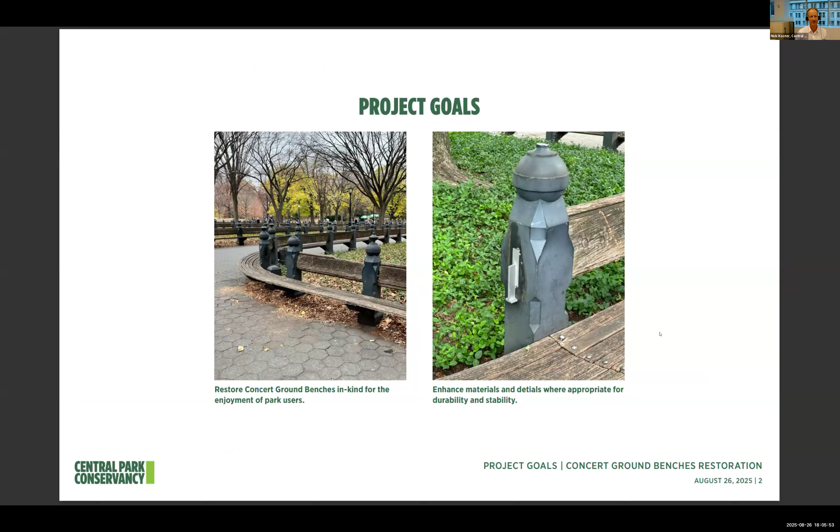Great, thanks Diane. So as Diane mentioned, the first project we're sharing today is an in-kind replacement of the seats and backs of the concert ground benches. The seats and backs have reached the end of their useful life, and as part of this restoration, we're going to be updating a few of the details and the wood selection for increased durability. So just to ground everyone in the location, it's located at the southern end of the park, at the northern end of the mall, near Bethesda Fountain, and south of the 72nd Street Cross Drive.

We have a few historical slides to show you the history of this. This feature was designed by Olmsted and Vaux, originally as a tree-lined element leading to Bethesda Terrace. Music was a regular activity along the mall, and in 1862, the ornamental cast iron bandstand designed by Jacob Wrey Mould was built, which you can see in the back of this picture. To accommodate the sizable crowds at these performances, the mall was redesigned by Vaux in 1873, and that's when the continuous wooden benches with the unique design came in.

So in the 1920s, the Naumburg Bandshell was built, and that was really done to provide a better venue for the concerts that had really grown in popularity in this area, and the benches were removed around that time. The area's layout was really oriented more towards the bandshell. The concerts continued in this area for many decades, but the photo we're showing you here is from the 1970s, showing how much this area had declined and really become a bit of an eyesore.

Over the years, we've done small repairs and maintenance on these benches, but it's now time, as you can see, for a full-scale reconstruction. A lot of the bench slats are splintering or missing in some cases, and some of the posts are damaged and need some work.

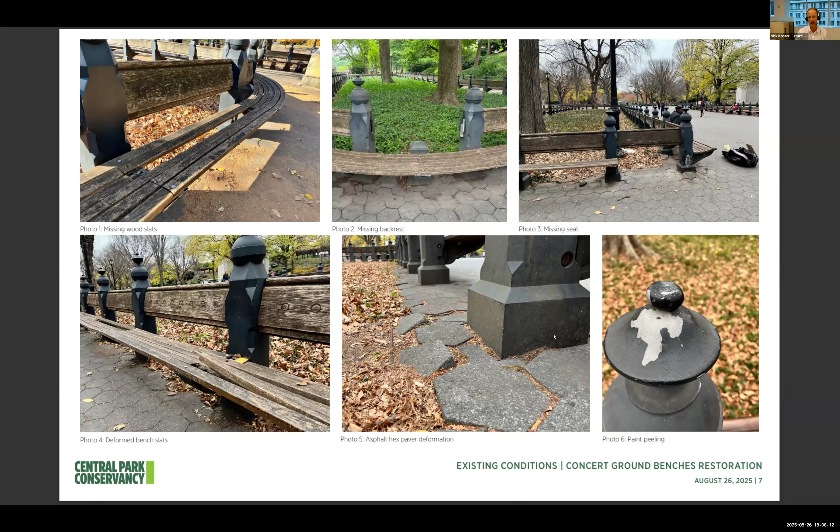So this is a project highlighting the scope. What we are doing is we'll be replacing all of the wooden bench slats on the seats and backs and replicating the unique flower pattern. We're going to be repairing, refinishing, and reinstalling all the cast iron bench posts, and we'll be removing and resetting the asphalt pavers around the benches.

This is a project we're hoping to get started on in the late fall, and it's going to be phased around this area, which has quite a few events. We expect it to take between 6 and 9 months. So I'll stop there, and if there are any questions on this project, we can answer those now.

We don't have to do a resolution, so we don't need to do our normal formal project process, but does anyone have any questions? Do we need to know what materials they're going to use for the benches, or wait till later for that? There will be no later because we're not going to do a resolution, but if you're curious, go for it.

Could you talk a little about the material for the benches? Sure. So the current benches are oak, and we have been working with a wood called Accoya. It's a treated pine product, actually the same wood we've used for the decking at the Bow Bridge and Gothic Bridge restoration. Both of those have been in over a full year season and are holding up really well. Currently, we're working with a couple different stain manufacturers since it's a very light colored wood. It grays out over time, but we're looking to see if there's a stain we can get comfortable with the finish of, to really ensure they look good. It's a really robust product, and we've been very happy using this wood elsewhere in the park.

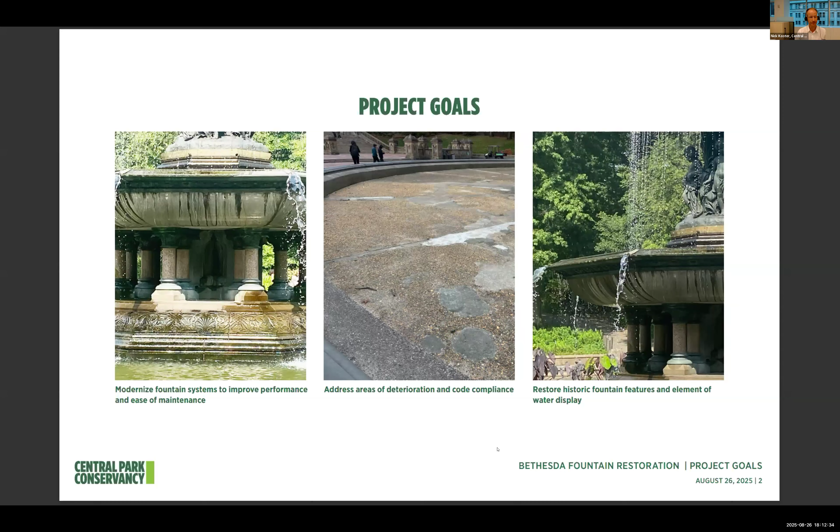Next, just to ground us, I'm sure most of you are very familiar with where this is located, just north of the concert ground benches on the other side of the 72nd Street Cross Drive, and this is the terminal feature of the mall. We are very lucky to have many historic drawings from the original fountain to draw from in our research as we're working through the design intent and looking at the missing elements.

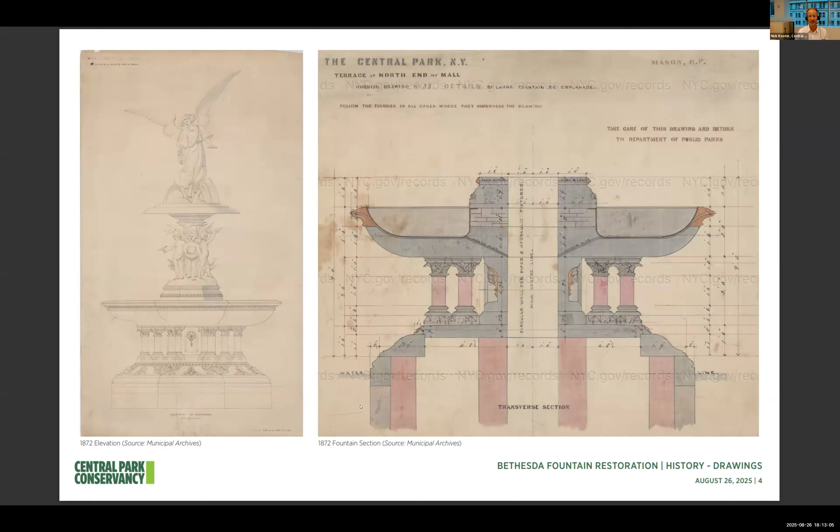We also have a lot of photographs of the fountain, which have helped us with our research. This is one from 1873, highlighting the Angel of the Waters sculpture, designed by Emma Stebbins, shortly after it was installed. Moving forward to the early 20th century, that's when the terrace was repaved with the paving we're familiar with today. And finally, this is a photograph of it fairly recently in its current condition.

Just to note, the Central Park Conservancy manages and maintains the fountain, which includes the annual rewaxing and cleaning of the sculpture itself and any ongoing maintenance issues with water flow or water quality.

Now to walk you through the restoration proposal, starting with the sculpture and the bronze features. Here we have an elevation of the existing and the proposed. The red lines highlight the areas where we are looking to recreate bronze elements.

The topmost one, the bronze applique below the putti, will be restored to conceal the exposed stone. There's a bronze lip at the middle basin that's going to be removed, cleaned, and reinstalled to address underlying issues causing a lot of the staining we're seeing on the granite bowl below.

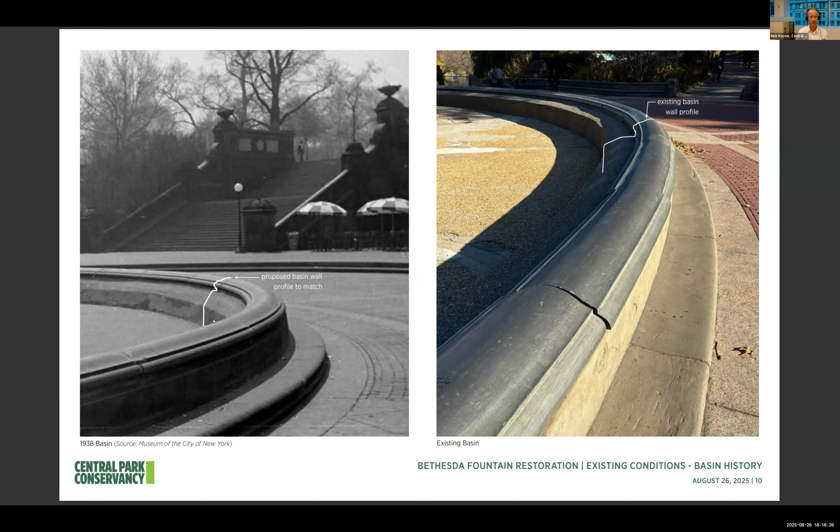Looking at the project now in plan, all of the work regarding the mechanical, electrical, and plumbing upgrades is located off the fountain itself to the northeast. Currently, there's an existing vault below grade that's mostly concealed within the landscape.

This slide is highlighting the upgrades that will be housed in this location, and it includes three new structures that will be screened by some existing and new proposed planting.

This is a zoom in of that same plan, showing the existing vault structure as well as the three new structures with their dimensions.

The new elements include a new RPZ, needed for code compliance, and a below grade vault for the filtration equipment we're going to need for water quality. I should mention that's something we've been doing on a lot of our fountain work in the park—creating recirculating systems with the fountains, but then also creating a filtration system for that water to ensure its clarity and quality. And finally, an electrical panel, which will be used for controlling the new equipment.

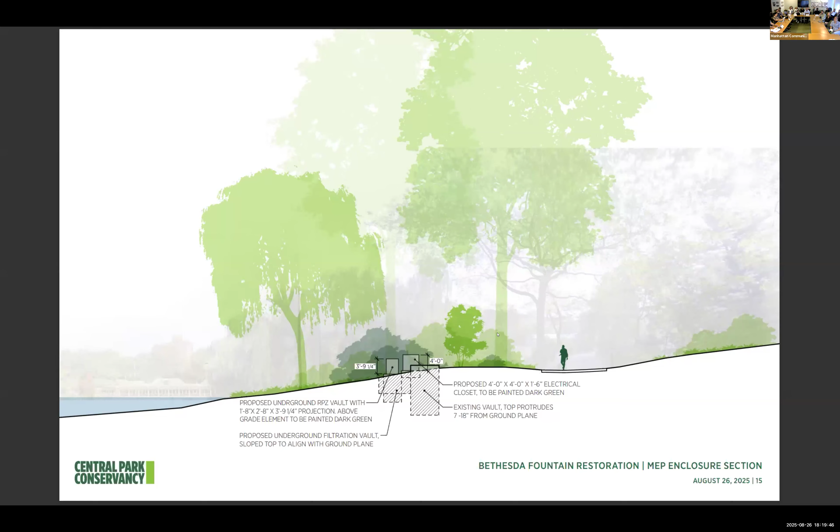Yeah, could you go back to slide number 8, please? 8. I noticed that on one of the old photos, you don't have something that you have on the new one. I'll show you what I mean.

So here you have a little gizmo, help me out with, you can't see what I'm pointing at. The flower that they're adding to the fountain. Do you see what I'm pointing at, the red? What's the story with that?

When we were doing research on the fountain, we did a lot of research through historic documentation and photos. We can tell from the historic documents that there was a floral bronze element installed in all 4 niches, and there's photo documentation of that. So our conservation staff used both the photographs and the graphic documents to recreate them in 3D using 3D software. We're currently doing 3D modeling and different prototypes with 3D printing, and those would be reinstalled in place. The other evidence in terms of that flower is that there are anchor holes that used to house where the original flowers were anchored, which are now patched. So we would be reusing those existing anchor holes so as not to damage any masonry.

So the existing bronze, we're examining to figure out the correct chemical composition. We do a hot wax treatment each year on all the bronze work. So any new bronze elements, we would try to align as much as possible with the existing bronze and refinish it in exactly the same way. It would be another hot wax treatment, which would have a similar patina to what is currently there, just a dark brownish greenish color.

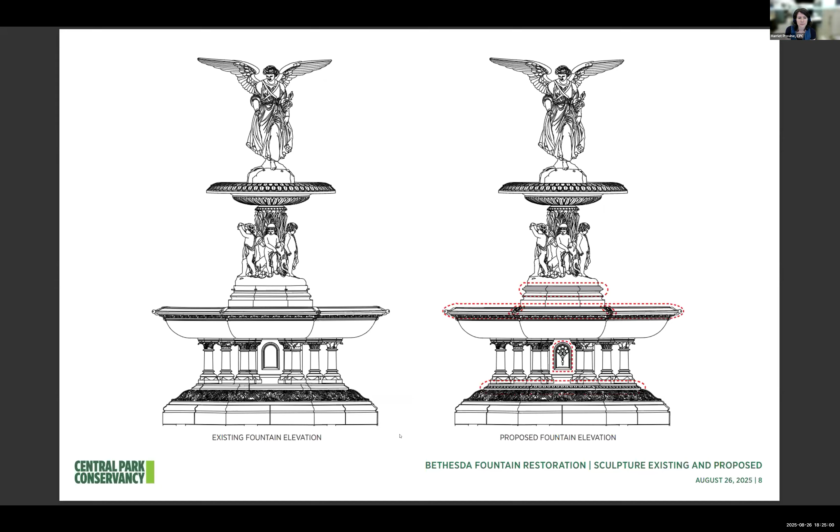I have two quick ones, one unrelated. This seems like a significant project. How long do you estimate the construction is going to take?

We imagine that it's going to be about a year of construction. We're looking to get it started in June of 2026, and the goal is to have it wrapped up by June of 2027.

That's everything, including the benches that are gonna take 6 to 9 months? The benches are a different project. Those we're expecting to start late fall of this year, and they'll be phased over time to minimize as much as possible the impact on that part of the park. But for Bethesda Fountain, for this project, we're expecting to start June 2026, and it would take a year, so we would be completed by June 2027.

Just a follow-up, what will it look like during the construction period? Will the entire site be walled off? Can we go back to the larger plan? There'll be a fence and staging area around the fountain and basin. The goal is for the paths that lead down to the fountain to be accessible so that people could circulate up through the arcade and up towards the mall. And there would be another fenced off area around the vault as well, but we really want to make sure the circulation is open as much as possible within this area.

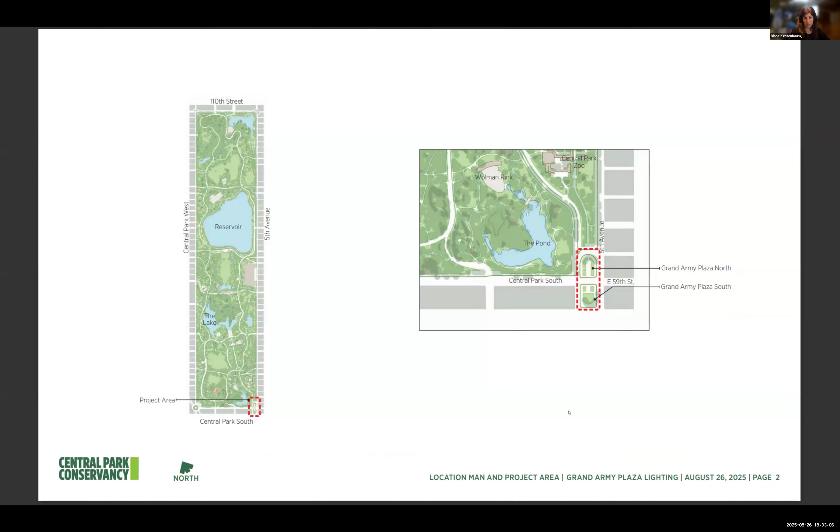As I'm sure many of you are aware, you know where Grand Army Plaza is. It's at the southeast corner of Central Park, and we're talking about work at Grand Army Plaza North and Grand Army Plaza South. That's what we are looking for your approval on. Just to refresh some of your memories, some of you may see the construction fence outside. Grand Army Plaza South is currently under construction.

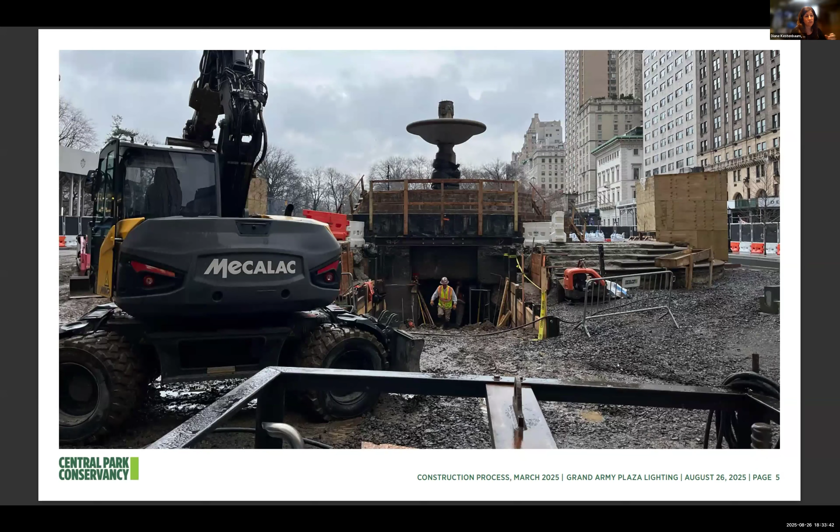We started this project in June 2024. We are completely restoring the fountain, restoring all the granite elements. We are restoring Pomona. She was removed from her perch earlier this year and is now in a conservation studio in Ossining. She's looking beautiful. We are expanding the vault underneath the fountain to give greater access to our operations staff to maintain it. And then last but certainly not least is all the amazing bluestone and granite curb work and everything we're doing here. We're making the plaza accessible and doing a lot of different elements, including lighting, which is the reason why we are coming back to you today.

So just really briefly, our project goals for this element of the current construction project are: we are looking to maintain the lighting levels required to meet public safety standards with historically appropriate fixtures. We of course want to meet DOT requirements for lighting infrastructure maintenance. And then a new element to this is we are looking to add nighttime lighting to some of the really beautiful historic features in the plaza.

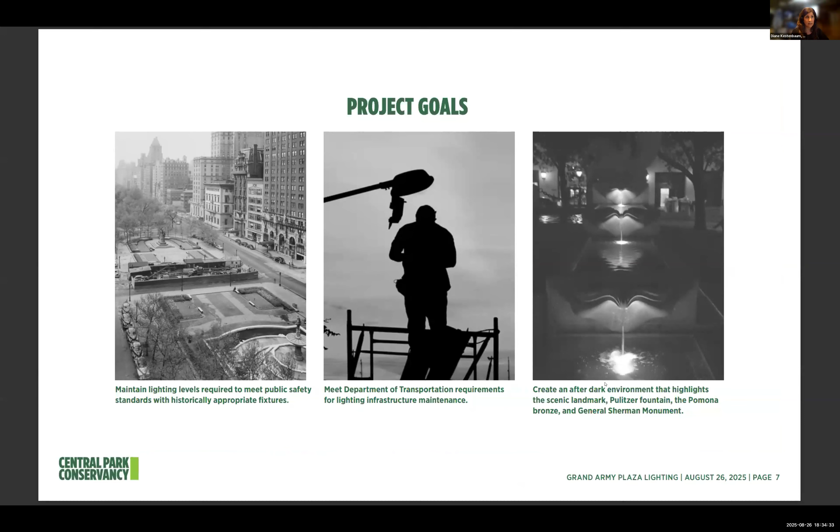That spurred the Conservancy to do this restoration project in the first place. We got the approvals in 2013, and given the more immediacy on the north side, that went first. Construction started in 2014 and was completed in 2015. The South Plaza was expected to go forward very quickly afterwards, but funding issues and the global pandemic delayed it. We did start the project in construction, as I mentioned, in June 2024, and the expectation was we were going to complete the South Plaza as it was approved in 2013, matching also what was approved for the North Plaza.

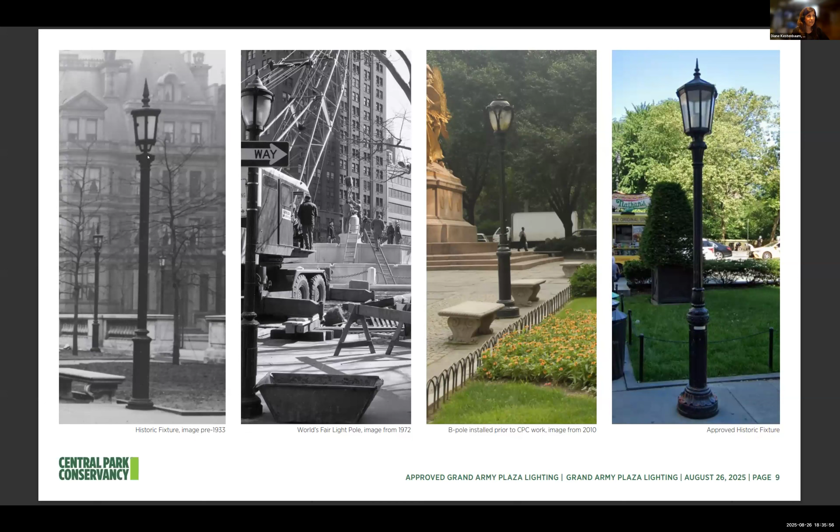Some of you may be aware that DOT maintains all of the lighting in all public spaces, public parks in particular, and so we have to follow their maintenance requirements. They require something called a photocell, which automatically turns the lights on at dusk. Of course it makes sense, right? You want to make sure the lights turn on automatically and nobody has to go out and hit a switch in order to turn the lights on. But the issue was that DOT said we couldn't use this fixture, and they gave us two options.

One is to use what's called a B pole. This is something that had been in the park prior to our construction project, but it's not a historically appropriate fixture, and it wouldn't match what's in GAP North. The symmetry between the North and South plazas is a huge feature of it, and so we wouldn't want to have different light fixtures.

The other option that DOT gave us was to install a larger, taller pole that would gang all the light fixtures together, and we could put a photocell on top. But given the issues with the B pole, we did not want to use that.

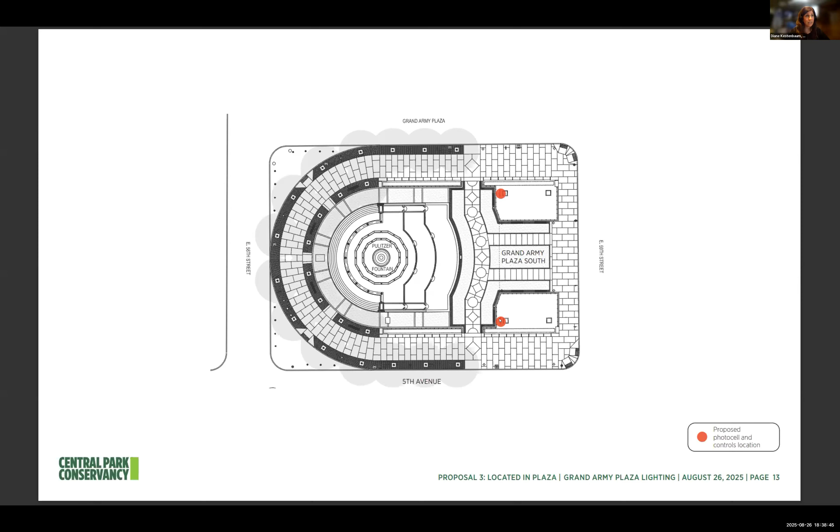So what we came up with, and what we're looking for your approval on, is to have two of these poles on the south side. We decided on two of them for symmetry, so two in the north and two in the south. We'd be able to put the photocell on top, satisfying DOT's requirements. These would be just outside the planting bed, and for the most part they would recede into the background. These are things people see in many locations throughout the street bed, the streets, and the park.

But one additional element we are looking for, taking advantage of the fact that we'd have these tall poles in the plazas, is to reinstall lighting at the plaza to light the General Sherman Monument, the Pomona statue, and the fountain.

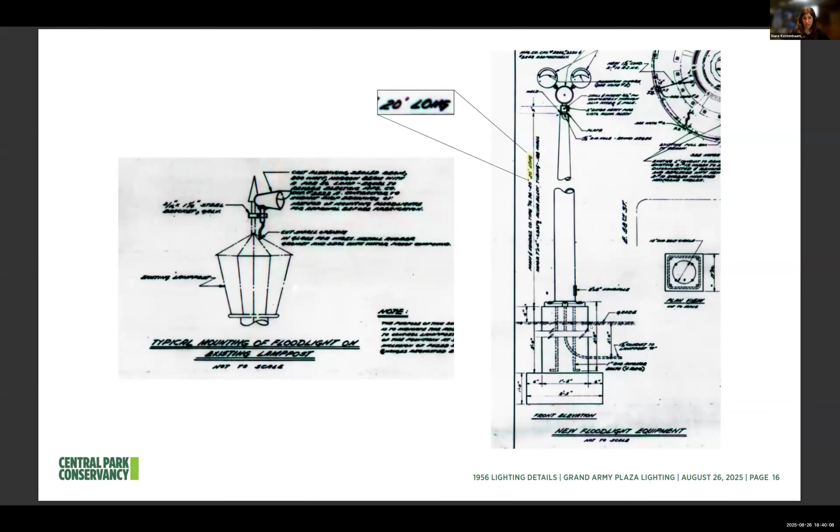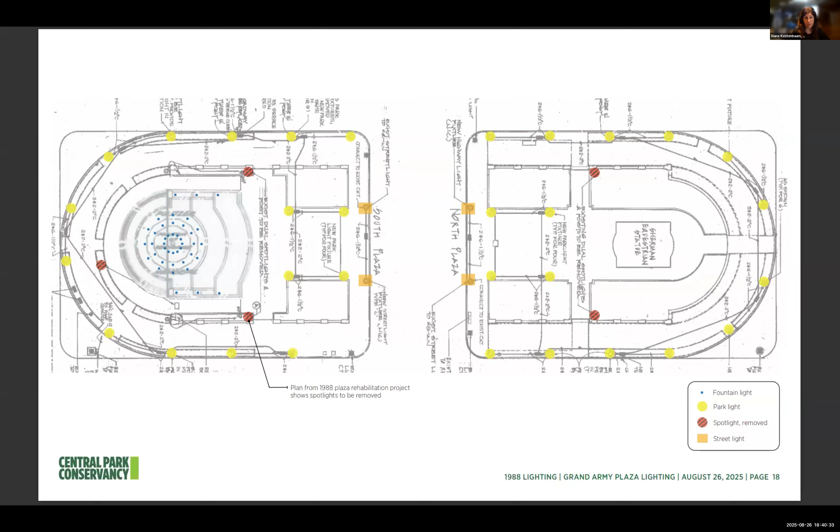But these were actually removed in the late 1980s when the Conservancy did a restoration project—that was the last time we did a full-scale restoration. You can see their little hatches in these red dots, so those spotlights were removed. The thought at the time was to install them on adjacent buildings, the Sherry Netherland, the GM building, the plaza, but that actually never happened. So these features have not been lit in a very long time.

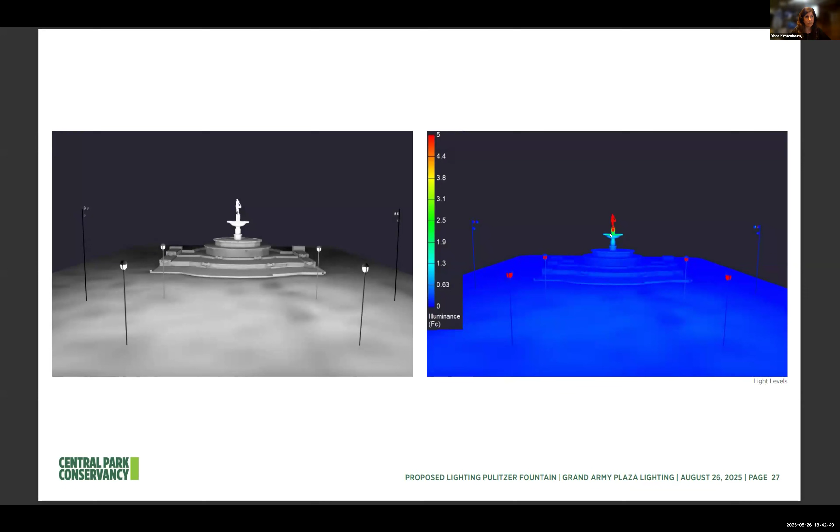So we did a few studies just to show what the lighting would look like on these heat maps, showing what would be lit for Pomona. And then this is in the winter when those pin lights in the fountain itself are turned off. It would just have a nice lower wash on the fountain itself, but it would still be focused on Pomona. And then the north showing Sherman.

And then this is what the fixtures would look like. There would be 4 lights on each pole focused on the monuments themselves. And this is actually what the photocell box, the control cabinet, would look like. This is the photocell, this is the control cabinet, this is the little photocell right on top. And then I think we're missing a light fixture here - there are actually 4 of them.

One other thing I wanted to mention is that we have also spoken to our lighting consultant about these lights and any potential impact they would have on bird migration. What they've told us is that since there are larger buildings that are lit, this would sort of blend in with what's already there. We are also using a 3000K light, which is preferable - it's a warm light, which is preferable to cooler color temperatures, is what I'm told. So it's something that's not supposed to impact the birds as much. But that being said, we would have controls so that if there is an issue during bird migration, we could lower the lights, we could do what's needed to protect the birds.

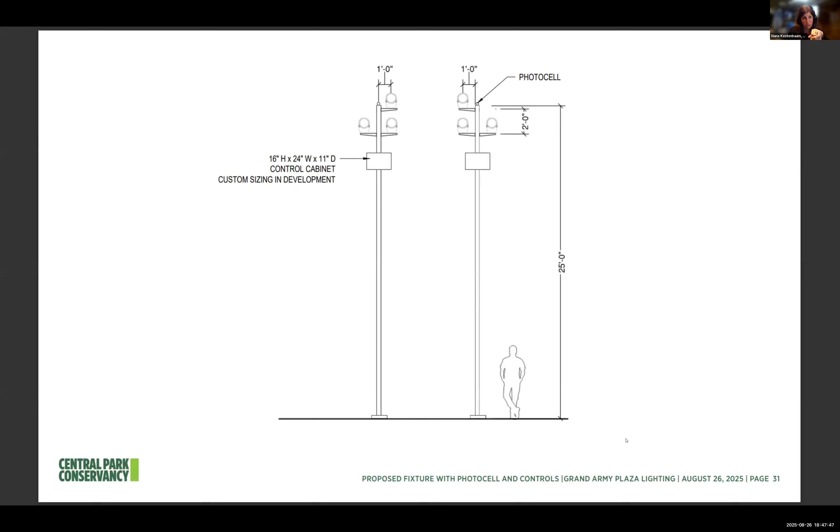Gina? Our reason to do this was so we could keep those historic fixtures and match what's in Gap North. Because we're doing so much to restore what the 1916 historic design was, with the paving patterns, the fountain, and so many other aspects, we wanted to keep those historic fixtures as well, the light fixtures as well.

How many historic fixtures are still going to be left on the North Plaza and then on the South Plaza? We could go back to the plan. It's quite a few, they're 12 feet high. Let me think of just the number, it'll take me a second to get there. Let's go to the first one.

Here you can see it's all the yellow fixtures that match the historic ones. So it's I think 16 per plaza, 14 or 16. And then the wiring would be just from one of the towers that will control when all these lights go on simultaneously? Yeah, yep. Okay, thank you.

My question is about the size of the control cabinet, which is mounted pretty high up where you have the four lights. Maybe you can talk a little about it, I think the size is a little unfortunate. Of course I'm sure you want it smaller too, but 2 feet by 1 foot by 16 inches is quite big. Did you consider mounting it at the ground? I don't know if that would be worse, maybe a tripping or kneeling hazard, but it looks a little peculiar floating up there to me.

Yes, that's a good observant question. The bottom of the box has to be at a minimum 12 feet off the ground. We did study it in a mid-range position and found that to be more offensive than higher. Right now we're showing the box size that the DOT said they would fully sign off on. We're meeting with them weekly on this, since we're deep in construction, and we're looking to reduce it, make it less wide and more long so it aligns more with the pole. We want to confirm that with them before we update it, but the goal is something longer and narrower.

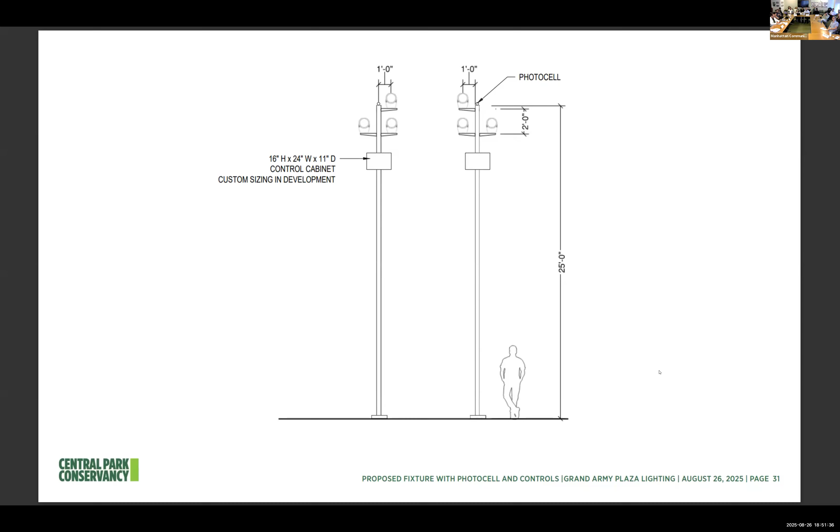Michael? Yeah, one more question. Just to the north, on the other side of 59th Street, just north of the North Plaza, there's a performance space where there's oftentimes artwork on exhibit, on the path toward the zoo. Was there, you know what I'm talking about, right? Yeah, just to the north. Doris Freedman Plaza, yes, I didn't know it had her name. Was there any thought to shining one of those lights over there for the artwork that you oftentimes install in that area?

That's done through the Public Art Fund, and it's different each time. I think if we did look at adding light for that, it would be part of a different project. It's a unique installation each year, and it's something we don't have as much control over. Thank you.

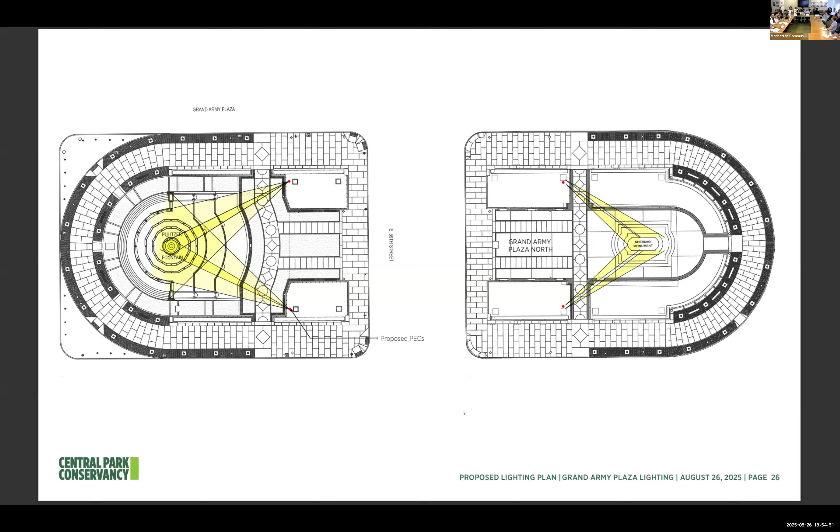Personally, I find it tough to conceptualize how these will look. I know it's impossible to design it without showing it, but is there a slide that best captures what it'll look like when it's all said and done?

This even shows it as well, though it's a little hard to see. You know what was helpful was when we looked at the precedent from the 80s, the red ones. That's three-dimensional. Maybe we can look at that slide to compare these proposed black ones to what was there previously. I think they were red, which was unfortunate.

We just put them as red to highlight them, to point them out. So let's look - if we know how tall these were, we'll have a point of reference. And this one was 20.

This looks a little bit - this typically would be 12 feet, so this looks slightly lower than that, maybe 11 and a half. So 20 versus 25. And these were 2 lamps per pole, we're going to have 4 lamps per pole and a box.

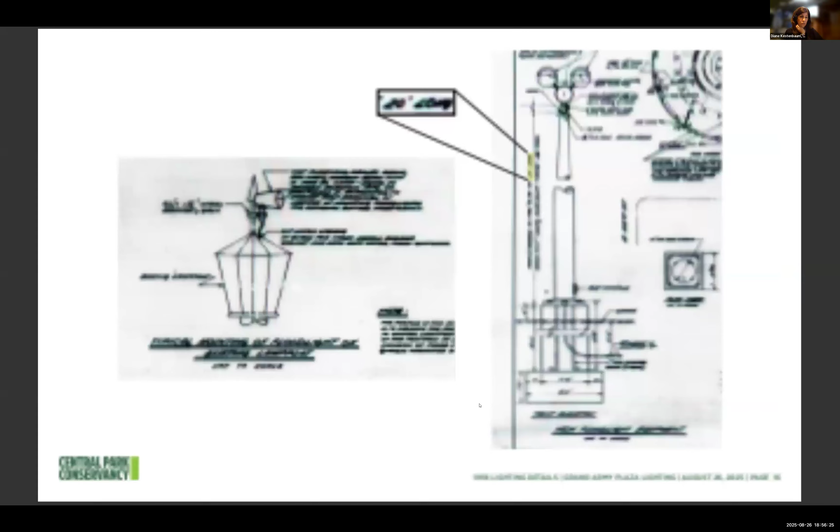I don't know if anyone remembers, but a few years back there was a similar proposal for lighting at the New York Public Library, in front where the lions and grand steps are. I think it was similar, they were very industrial looking. They were by the DOT, and there were precedents of historic fixtures out there, and it was mixed. But there they kind of got mixed in with the very tall mature trees and there's so much street furniture - flagpoles that run consistently - they just kind of got lost in the mix. Do you remember that? But here it's not as forgiving, they're not as hidden. Maybe when these trees are mature - I'm not sure how close they are to the trees - but I do remember seeing something very similar at the New York Public Library.

Other thoughts? Comments, concerns?

Is it more palatable with street lights - I was just pointing out that the street lights are 24/7, is it more palatable if it's more clustered? I'm not a lighting designer either, but if these tall lights are closer together as a cluster and can still accomplish the goal of lighting the statues, is that something that was considered in the design, so that it's not sticking out as much as seems like could be a concern here?

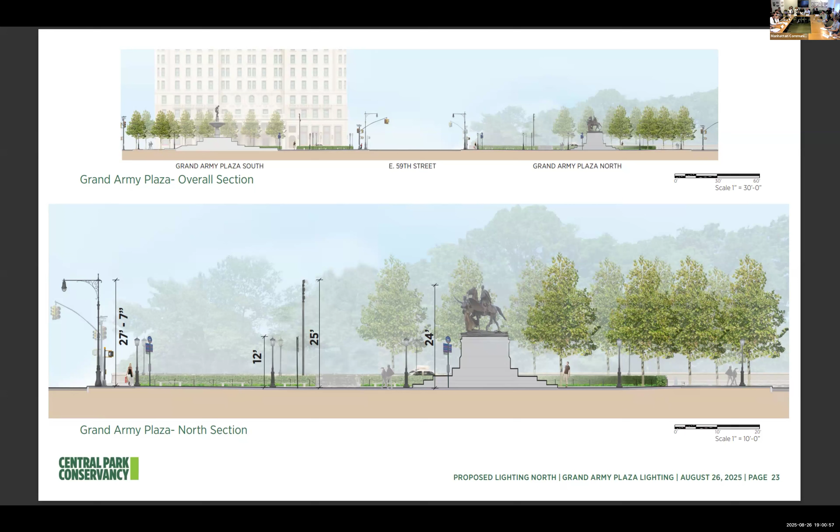That concludes the Central Park Conservancy presentations. Thank you to the whole team. Obviously we all love Central Park, and it's fascinating to see these presentations, especially from the fountain and Grand Army Plaza, and the benches less so, but these are super important landmarks for all New Yorkers, so we really appreciate you all doing the work, and on top of it, coming to present to us tonight.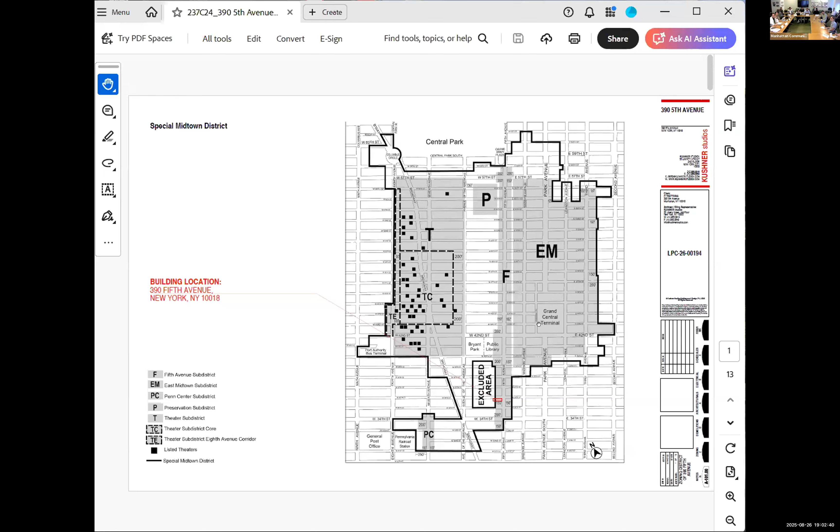Hello everyone, my name is Ida and I'm here on behalf of the applicant team for proposing new louvers at 390 Fifth Avenue. Here with me today is Ariel and John. Could you talk a little slower? That's not even picking up the words you're saying. Could you speak a little slower and louder? Yeah, of course, thank you.

So joining me here today are Ariel and John, my teammates. We are proposing new air intake louvers at 390 Fifth Avenue. This building is located on the corner of Fifth Avenue and West 36th Street.

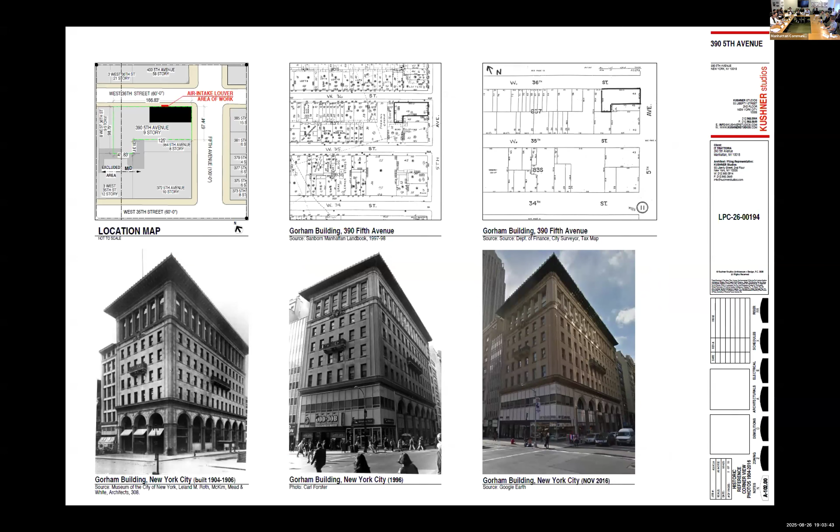This building was constructed between 1904 and 1906, and its facade was significantly altered in 1960, when the original double-height arcade with ionic columns and bas reliefs was replaced with a more modern aluminum and glass storefront. In 1984, the building was designated as an individual landmark, with the glass storefront alteration already in place.

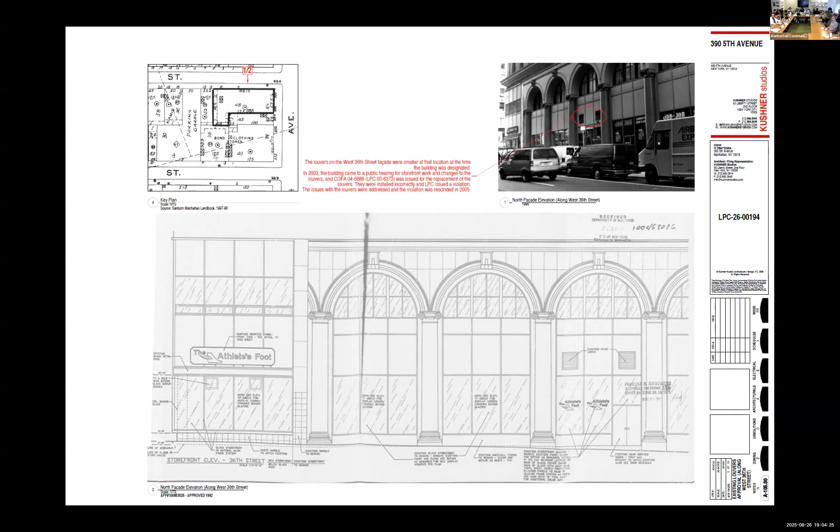Since then, the ground floor facades have remained unchanged, aside from business signage and the louver enlargement on the West 36th Street facade. Along the Fifth Avenue facade, these louvers were already existing at the time of designation and have not been changed since. But on the West 36th facade, there were smaller louvers at the time of designation, and in 2003, the owner applied to the Landmarks Commission for storefront work and louver modification and enlargement.

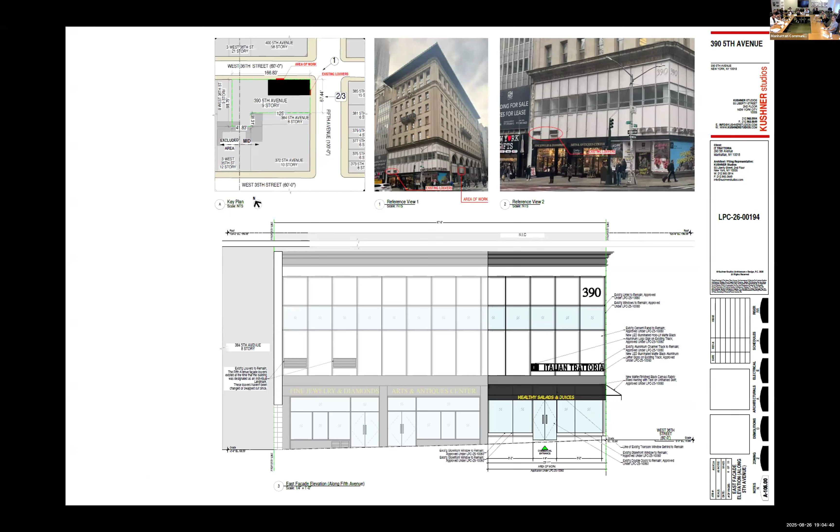Here you can see the already existing louvers on the Fifth Avenue facade that are untouched. Currently there's an interior and exterior renovation already approved by the LPC happening on the first floor for a small business tenant. Today's application relates specifically to the additional air intake louvers required for the new mechanical system in this space.

As you can see here, the proposed louvers sit on top of the storefront window right next to the existing ones. We are proposing the installation of 3 louvers, out of which 2 will serve as a source for outdoor air ventilation and make-up air for the kitchen and AC units, each 3 feet by 5 feet, aligned with the existing movement of the storefront panel system.

The proposed louvers are located at least 10 feet away from the existing exhaust louvers, based on the 2014 mechanical code. The additional third louver we are proposing is non-functional, for design purposes only, to match the existing ones, but with minimal disturbance compared to the grand existing ones.

These photos show existing storefront conditions from a street viewpoint, calling out the location of the proposed louvers, to give a better understanding of their visibility from the street. They will look similar to some other examples on site, such as 366 Fifth Avenue, which has louvers on both the Fifth Avenue facade and West 35th Street facade. We also have 404 Fifth Avenue, with louvers on the Fifth Avenue facade and West 37th Street.

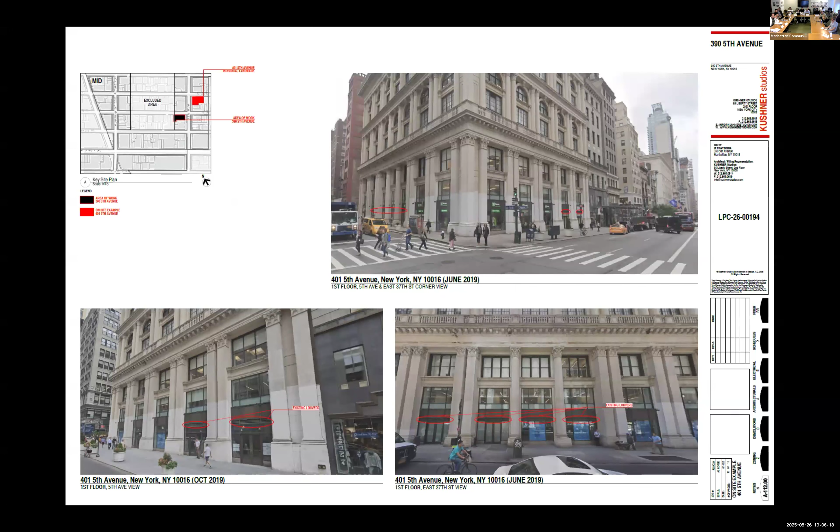401 Fifth Avenue with louvers on Fifth Avenue and East 37th Street, as well as other examples along West 36th Street, such as 3 West 36th Street, 389 Fifth Avenue, and 70 West 36th Street, all with louvers along the street.

This is it, so thank you so much, and please let me know if you have any questions. Thank you. Questions from the committee?

Forgive me if I missed it. Are you representing a new tenant in the space or the building owner? The new tenant of the space. New tenant, okay, yes, thank you.

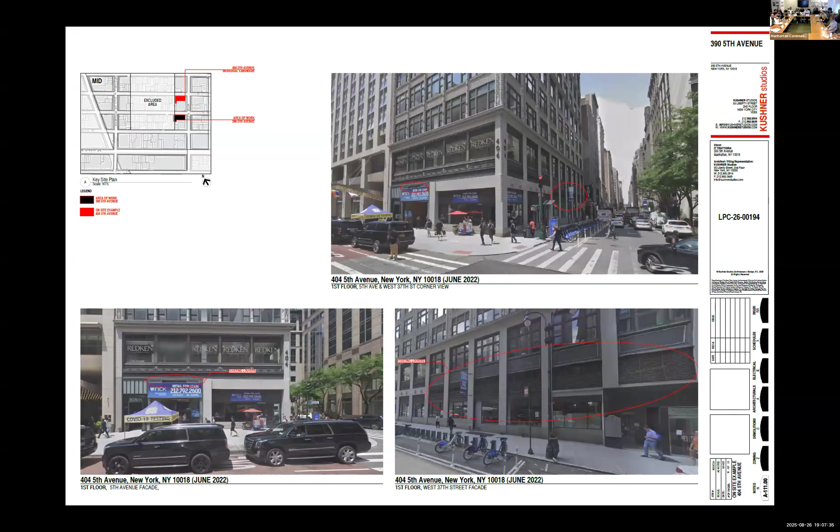So these, you can do louvers. Are these louvers for intake or for exhaust? Intake. The existing ones are exhaust, but the ones we're proposing are only intake. So they're taking air in for what? For the kitchen and the AC units inside, taking the air in. Where's the air coming out?

If you have a kitchen, you probably have an exhaust, right? Yes, there's an exhaust system in the kitchen. So there's a hood, and the hood leads to exhaust on the building. Does it go to the roof, or is it coming out of the louvers? Coming out of the existing louvers. I was building a new intake louver to make up for the new system.

So the existing louvers will still stay there, right? These will be just for the air conditioning system, and proposed new kitchen equipment. We're keeping the existing equipment, adding an additional system.

So in relationship to the old louvers, where are the new louvers going? Are they close to each other? Yes, side by side. So this is the existing and these are the proposed new ones. So the existing will be like, what's that, 3 feet away from the new ones?

No, they're about 20 feet away from the new ones, because it has to be at least 10 feet away for the mechanical code, so right now it's about 20.

So show me where the old ones are. Where? On that drawing, so that's them? This is the existing louvers, the exhaust louvers. And then these are the new louvers we're proposing for the air intake. So that's 20 feet between them? Between this and here, this is just for design purposes only, so we can match existing.

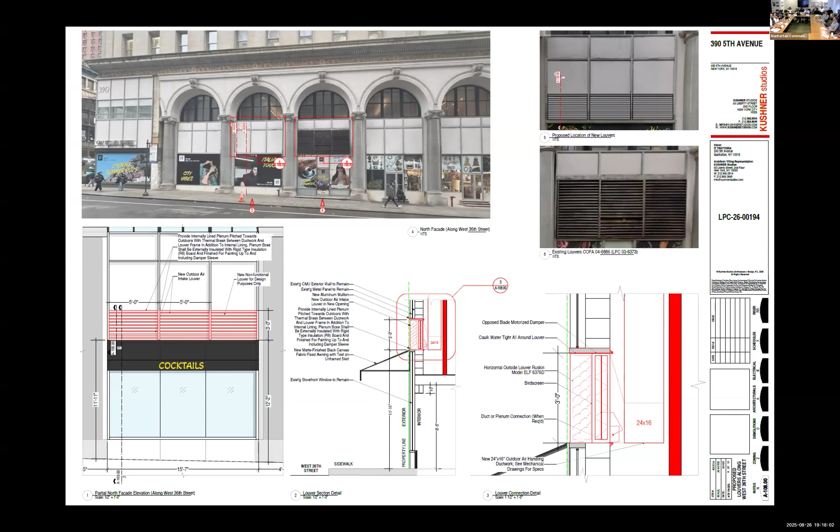Last, but certainly not least, we have 636 Sixth Avenue.

I'm Julie Rosen with Higgins Quasebarth and Partners, Preservation Consultants on the project. I'm Robert Lafferty, Chief Operating Officer of the New York Hotel Trades Council and Hotel Association of New York City Health Center, Inc. Michael Lynn, Design Director at Gensler, for the architects.

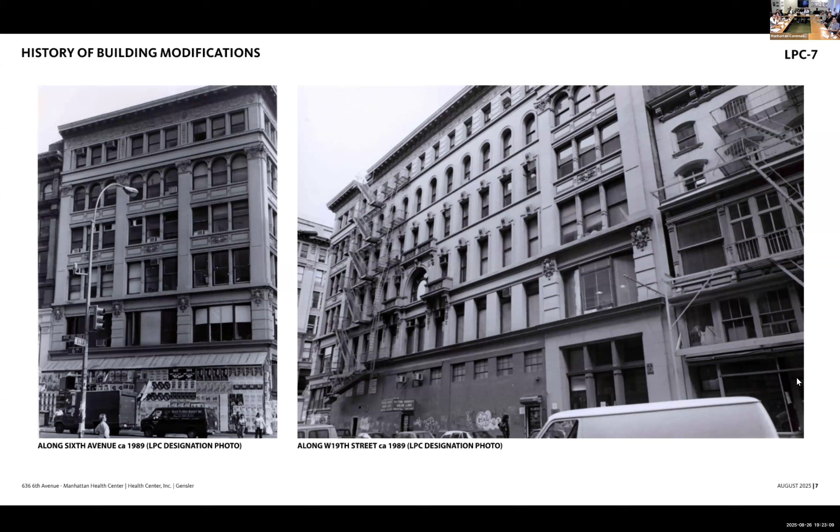This is an existing photo of the building. The ground floor storefronts and piers were all from a 1998 LPC commission level approval that essentially reconstructed the base of the building, so everything we have at the ground floor here is non-historic.

Some infill, the piers are actually a mix of cast stone and stucco cladding. The infill is aluminum. The heavy spandrel panels actually house roll-down gates for the private retail tenants. So again, everything there is non-historic.

Above that, we do have the historic facade in place. The cladding at the piers above the ground floor are limestone. There's some terracotta detailing. There are existing wood windows, the bay windows we see here at the second floor, those are historic. We are proposing to replace those in kind with a change in operation. All of the windows above were replaced about 15 years ago in aluminum.

There is also a quite extensive scope of facade restoration work currently happening, so as you'll see in our mock-up visibility slides, there's actually pipe scaffolding all over the building right now. These photos were taken just before that went up.

Just some other photos of the 19th Street elevation, and all of that non-historic ground floor infill does continue around 19th Street. We do have an arched multi-light window at the third floor in the middle of the facade.

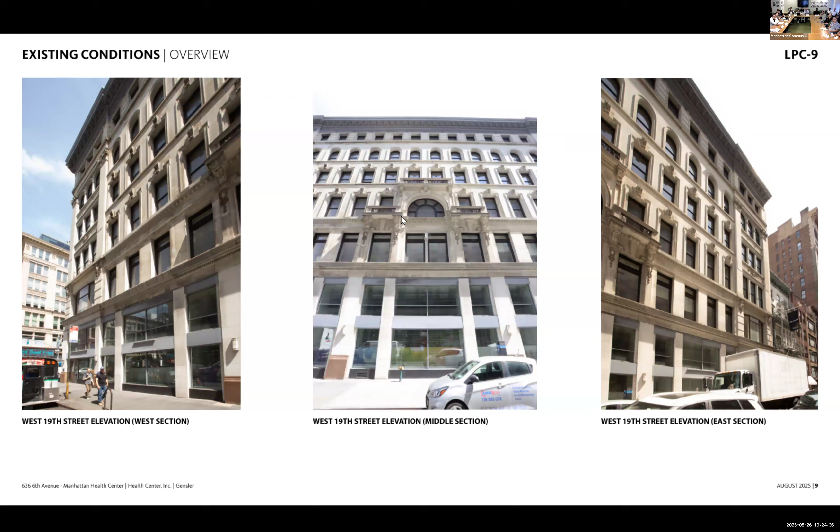And then just a summary sheet of our ground floor conditions. As I pointed out in one of the prior photos, we do have the existing limestone surround and cast iron framing existing at the easternmost bay on 19th Street. That will all remain in place as part of our current proposal, but we are proposing to remove the LPC-approved marquee and the non-historic stainless steel.

And then just some detailed photos for you of the windows. Again, on the left are the wood bay windows. Those have seen some changes over time. There are non-historic mullions that were added to some of the center lights, again non-historic, but otherwise the profiles and the material are historic. We're looking to retain the look and the profiles and dimensions of those.

There are, I believe, 5 of those windows that will be replaced. Michael will go into more detail for you later. And then on the right is our arched window that's located on 19th Street, also wood, painted black. There's only one of those, and again we're planning to replace that in kind, but with a modification to the operation.

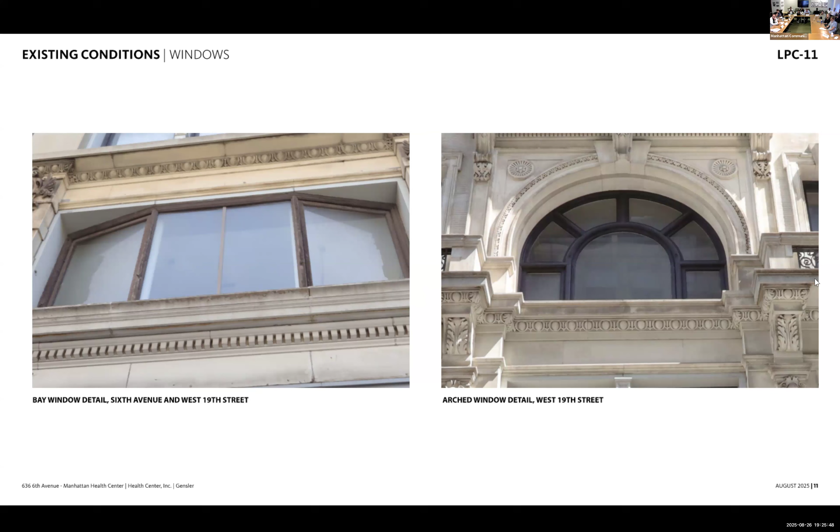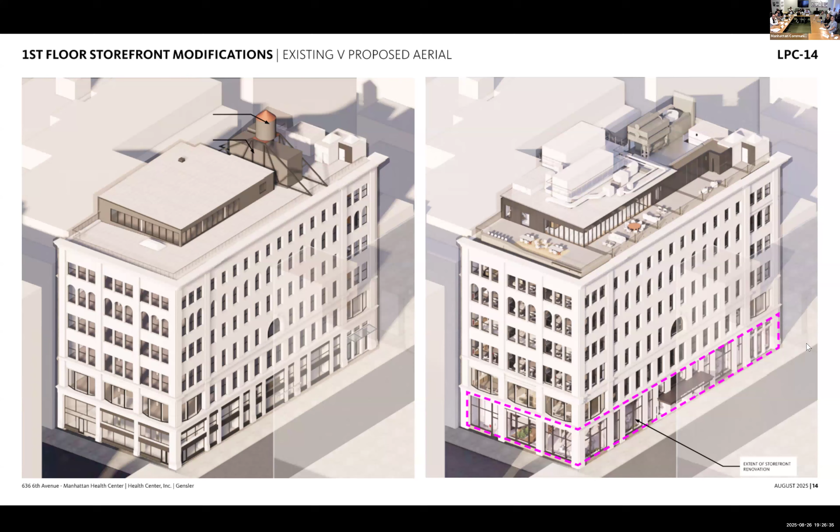So this is just our transition slide into our storefront modification section, again highlighted in pink on the right.

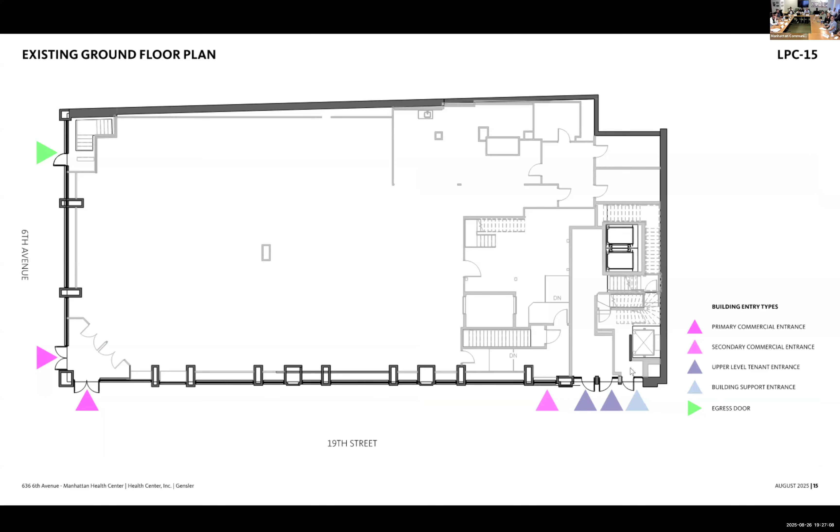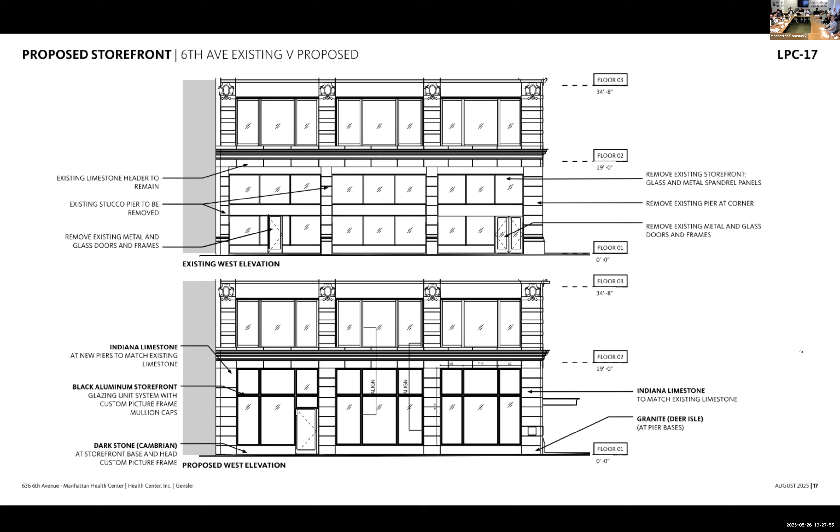I'll talk about big moves now, and then Michael can go into the specifics. Big moves are really removing all of that non-historic infill and inserting new infill that is more contextual, not only to the building, but to the historic district.

So we're looking at installing new piers clad in true limestone to match the floors above. We're going to take out all the stucco and all the cast stone and put in limestone. We're also going to take out the non-historic aluminum infill and install new aluminum infill that's painted black with this tripartite configuration to represent other storefronts that we see throughout the district.

There will be a new marquee at the new entrance on 19th Street. And I think in one of the bigger, more exciting moves, all of these misaligned piers that we see in the existing elevation are all going to be realigned and reconfigured to align with the rest of the building on the upper floors, to create symmetry and a nice continuation of that vertical expression.

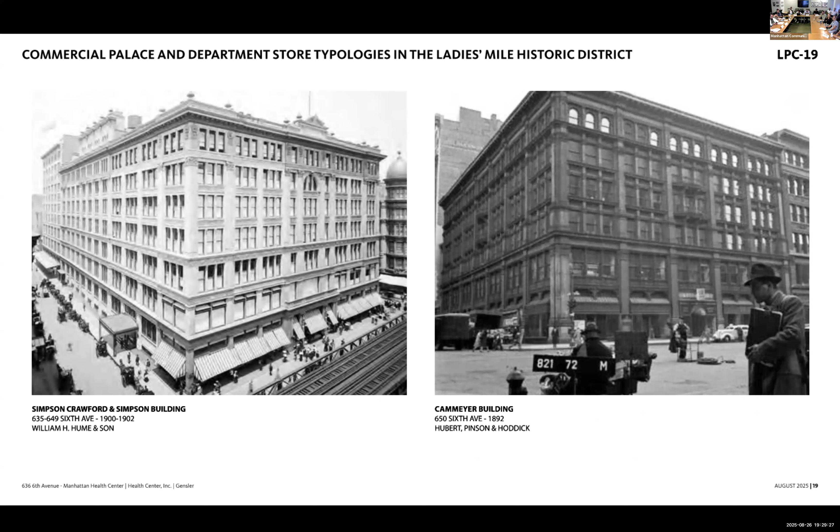We also historically saw a variety of rooftop appliances. On the left photo you can see chimneys, water towers. We see a lot of bulkheads in the district. So there's a very active roofscape that you see in Ladies Mile that really is part of the character of that historic district.

And similarly, LPC has approved other new storefronts at historic store and loft buildings throughout the historic district. Again, that typical tripartite configuration of a bulkhead, a large display window, and a transom -- that's really what we're looking to replicate in our new design.

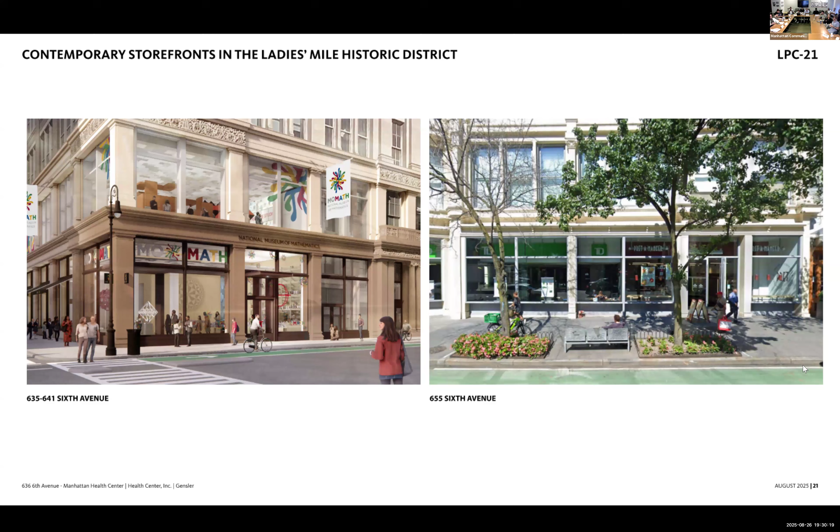And then finally, we see a mix of historic canopies and new canopies that LPC has approved in the historic district. We see them a lot of times on side streets, so we do see our 19th Street canopies kind of fitting into this overall historic and contemporary context. I think with that, I'm going to hand it over to Michael to do the design presentation.

Great. I think what's great about our partnership is that from the very beginning, we were completely aligned on the vision for this building. We all love the building. We really enjoy being part of this amazing context. So we want to design together this building that really fits into that historic context.

So with that said, I think Julie alluded to a lot of the design moves already, but the very key thing that we tried to do is to think about what this building was originally planned to do with the architectural moves, what exactly were the elements that we want to carry through, and how we want to adjust and adapt to that original design.

So from the very beginning, we thought the first thing we have to do is make sure that the base is redesigned to align with the original piers from above, so that the foundation of the building has the strength back again. And that's why this alignment is so critical for us -- before it was spindly, thin piers, we want to make it more robust to align with the piers above.

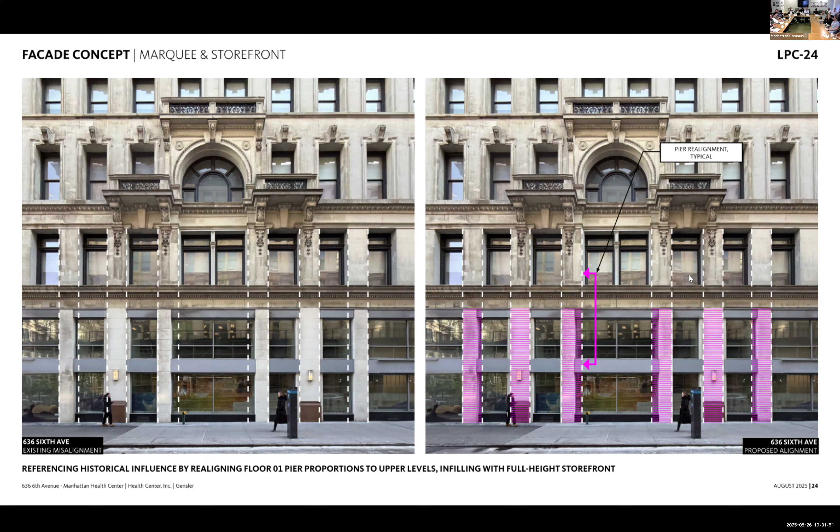And then the second move that is critical for us is this tripartite composition above. We thought that was such a strong move for symmetry on 19th Street that this had to be the main entry for our building. So this is the new identity, this is the new vision and entry point for our new building with this new use. And with that said, with that tripartite composition, we wanted that marquee to span that, not only for function, but also as an architectural statement.

The design of the marquee took the design of the original cornice in that profile and modernized it a little bit, so that the profile of the marquee has this curved, very gentle arc, and then comes to a crisp edge at the ends. That is the redefined modern take of the cornice.

For the storefront infill, we miniaturized that arc and curved feature, and had fins that project out that also have a very delicate and decorative treatment for the windows and window frames. And the transom, which is really critical to the district, is something we'd like to continue that language through.

So with the storefront, the darker infill between the new strong vertical piers - I'll walk you through the materials. The Indiana limestone will replace the stucco and all the different materials that used to make up the base; we're going to match the color exactly as it is from above. At the base it's going to be granite, Deer Isle granite, which you can see everywhere in the district and around New York City.

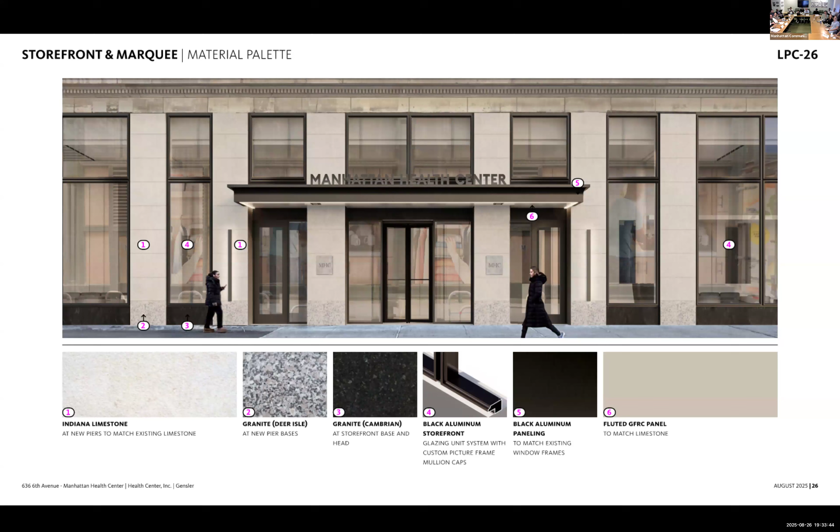For the infill piece, we have dark aluminum black frames, and below it's going to be a little darker granite, just so you have contrast between the piers and the infills. For the fluted GFRC panel, that's going to be the soffit. This rendering is a little exaggerated so we can see the soffit above, but the idea is that we wanted to create this subtle arc language on the ceiling itself. That's a GFRC panel that we'll try to match in color and texture to the limestone.

Here there's going to be a ring light that surrounds the perimeter of the marquee with heaters to keep you warm during the cold days, and this is, as I said earlier, very functional as well. There are two sets of swing doors on either side of the central entrance that we hope everyone uses as a revolving door.

We're going to get into the signage and lighting in a bit, but the main sign for Manhattan Health Center is not going to be illuminated. There will be a light in front that grazes it very subtly so it gets a little enhancement for attention.

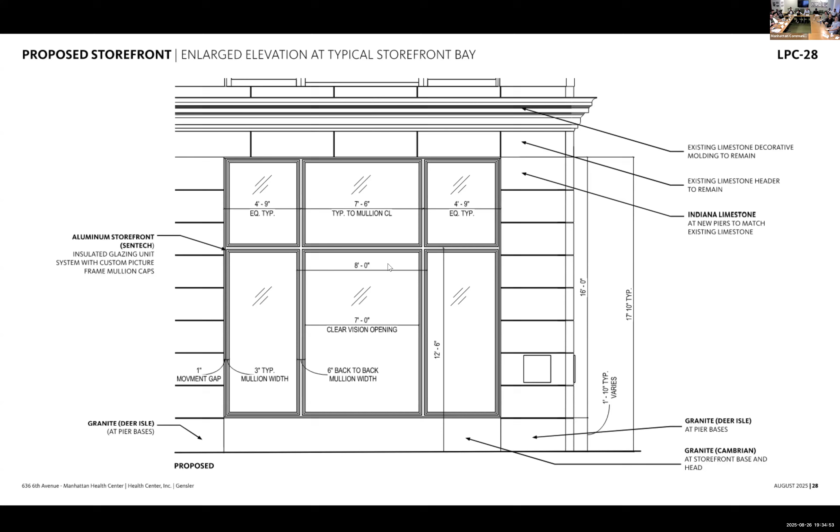Then there's a lot of details - we can always come back to them, but we'll run through these a little quickly so you see the full picture. This is the drawing of the storefront with the horizontal transom.

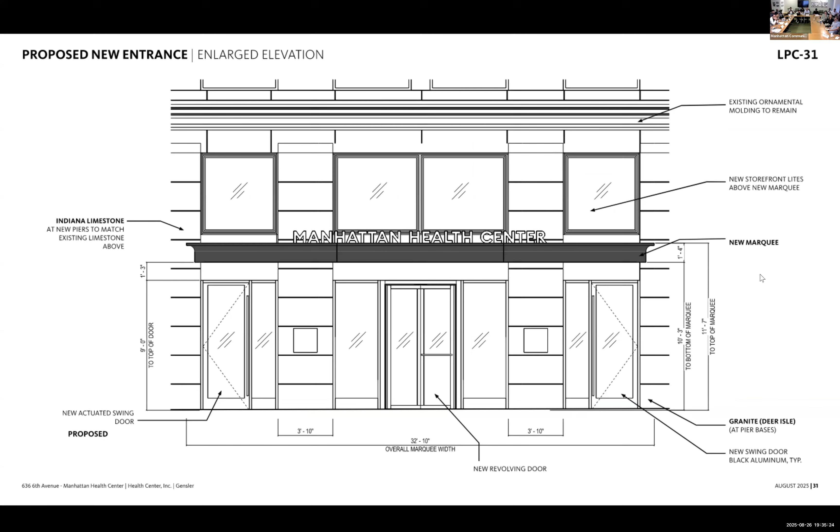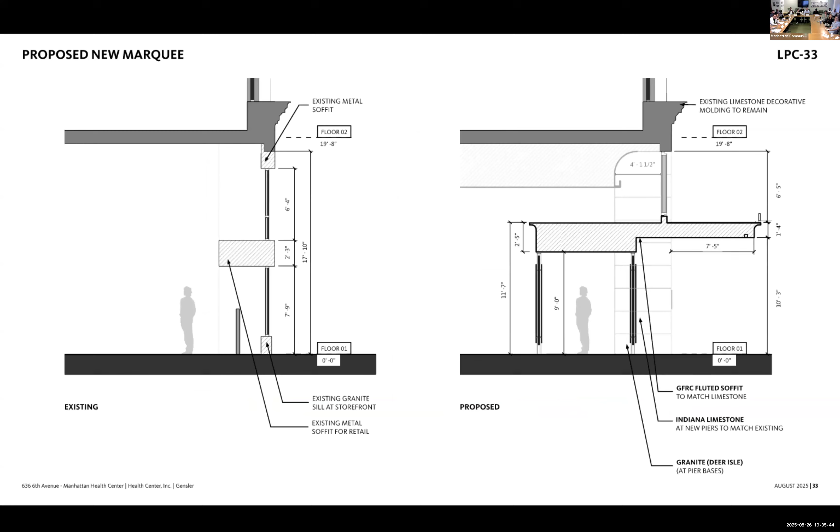And for the signage, as alluded to earlier, the lighting right in front will graze Manhattan Health Center very subtly. The plaques themselves - the letters are about 8 inches tall, so very modest in scale compared to the marquee and the building, but big enough to be noticed.

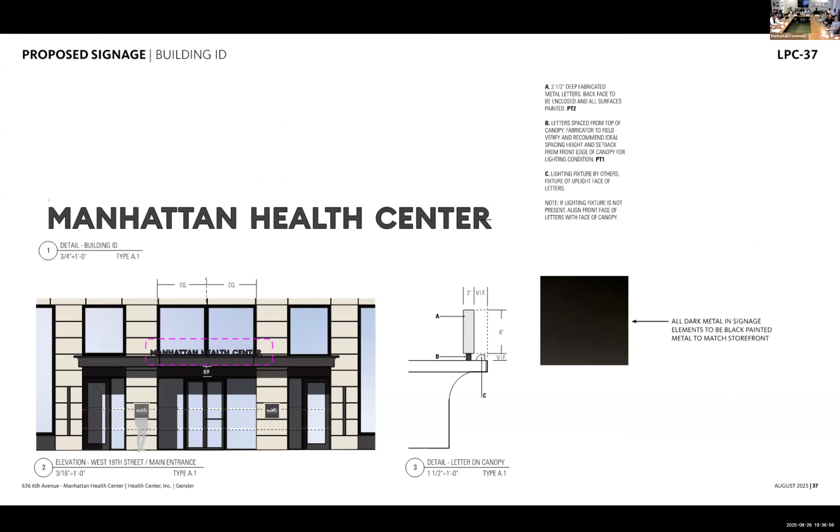And we thought the corner would be a defining moment. A lot of people are coming from the subway on 6th Avenue, so it's important to show people, hey, this is the actual address. So on both sides of the corner, we're putting plaques that indicate the address too.

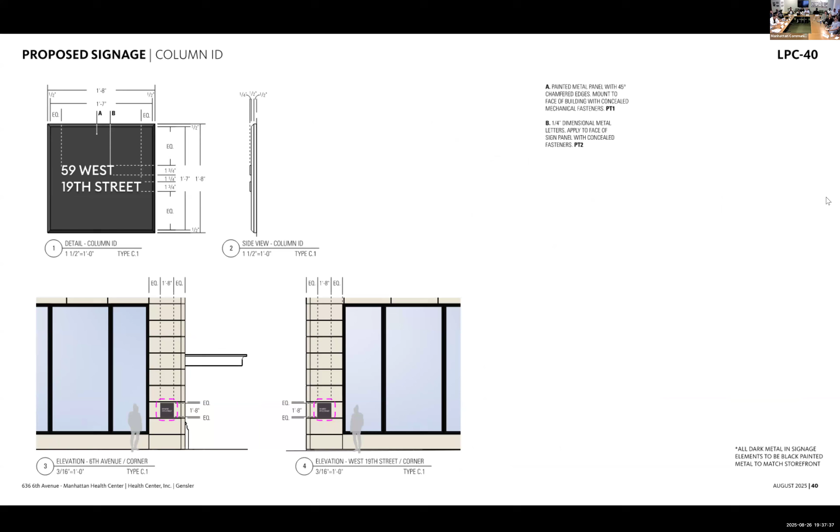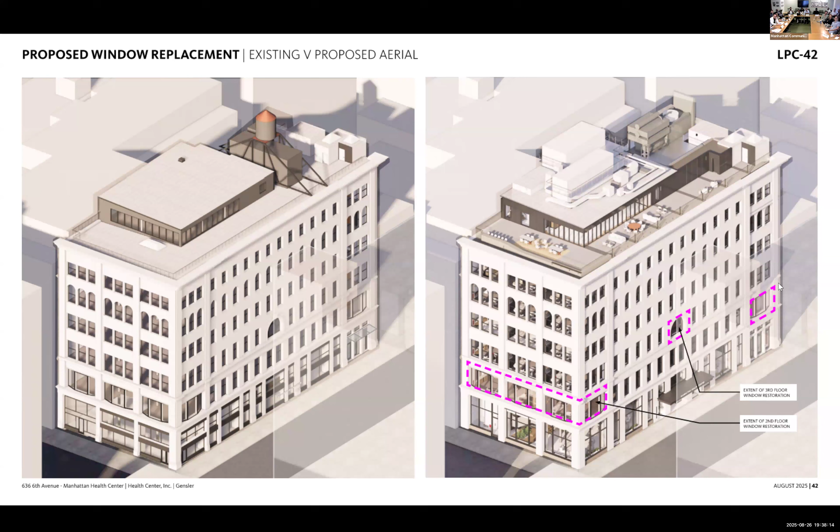With the original windows, as you can see, they have kind of deteriorated over time, but they're beautifully designed. So we wanted to keep the design intent exactly the same if possible.

The existing windows, the 2 side lights, are center pivot windows, so they operate like this. Unfortunately, due to the heavy weight of the glass and the way it was built, we cannot repeat and replace it with center pivot windows, so those side lights are fixed. However, for the current new use, there's no reason for us to open any of these windows anyways, so being fixed should have minimal impact on the look of the building.

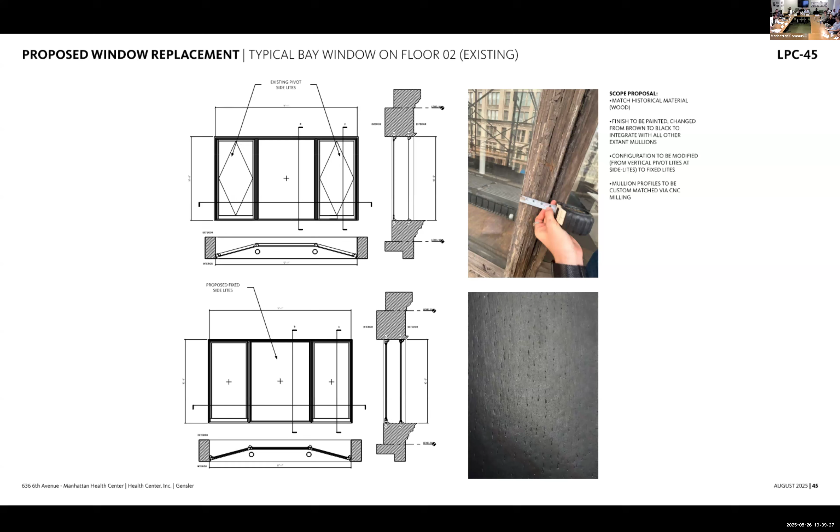Here are some of the details. This is before and after. We're attempting and trying our best to keep the profile dimensions as closely as possible to the original design intent. And here on the right side, you see the larger glass unit that we are designing.

Yeah, finished, but still the same wood. We're going to use wood, but we're also going to paint it black to match all the other windows that have been replaced throughout the building, so that all the infills and all the windows have a consistent language throughout. Also, one thing to note, the face of glass and the profiles and its relationship to the building face, we're going to keep it exactly the same, so there will be no change in depth whatsoever.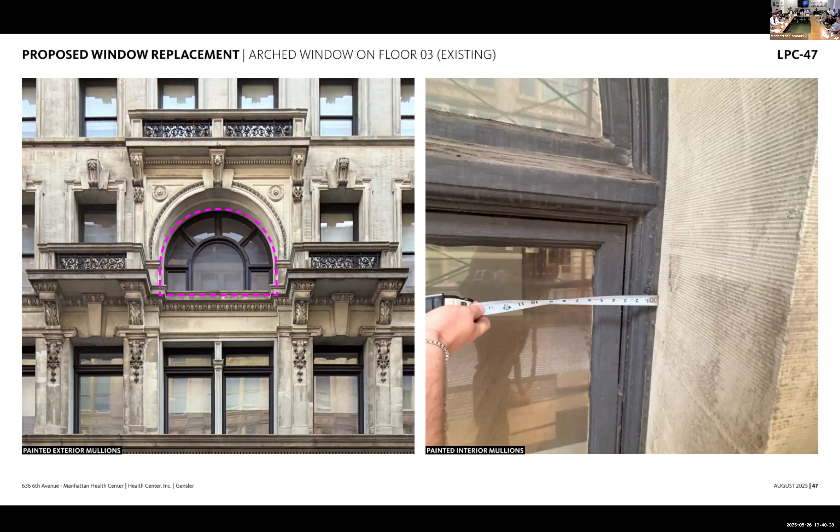Now for this beautiful arch window, we are also replacing it with wood, and as you can see, it has also deteriorated a lot over time. And here are some of the other photos.

So right now the existing window, the center one is also center pivot, and the 2 small side ones are also center pivot. Unfortunately, for the middle one we could not make it an operable window, but the 2 small side ones we are able to, no longer center pivot but able to pivot on top. So those are operable, not that we will open it at all, but it is operable.

And in the very same way, wood windows, we're painting it black to match the rest. Here are some of the details. And just to clarify, this window is currently painted black, so the idea would be to just match the existing finish.

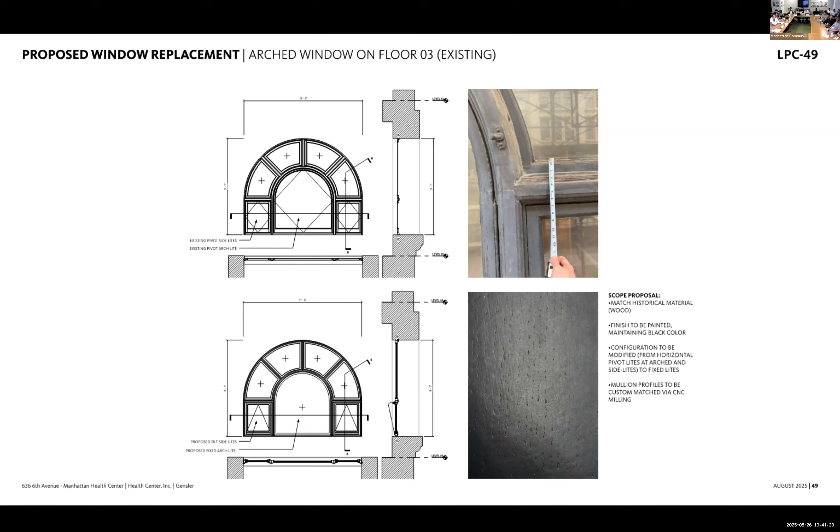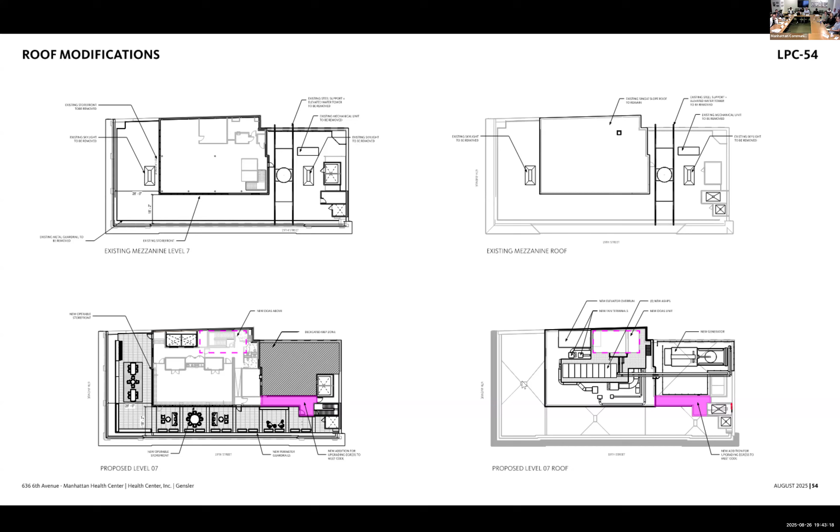Here we're going to run through a bunch of sections and sightlines. This is from across the street, looking up, so that diagonal is sort of the sightline. This is the previous and proposed condition. The new equipment is set back as far north and as far east as we can.

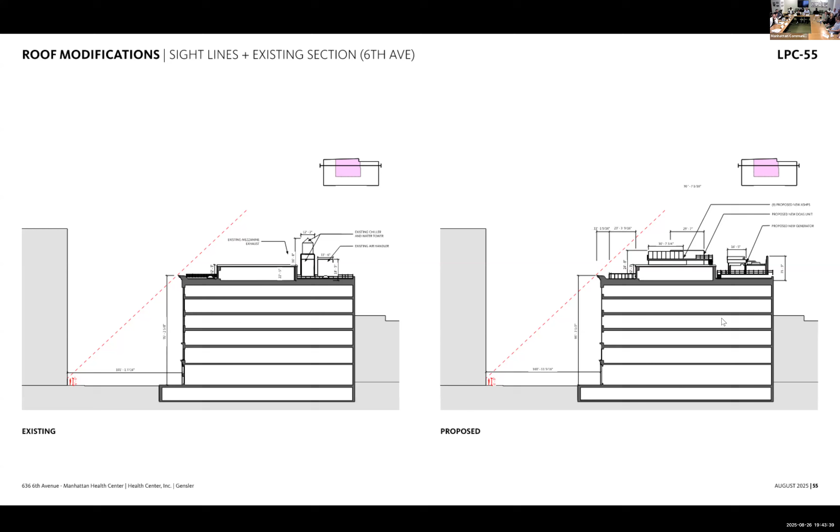Section on 19th Street, further east. As you can see, the water tower, which used to be a very dominant feature on the roof, is being removed, and you will see in the sightline photographs that it will no longer be visible.

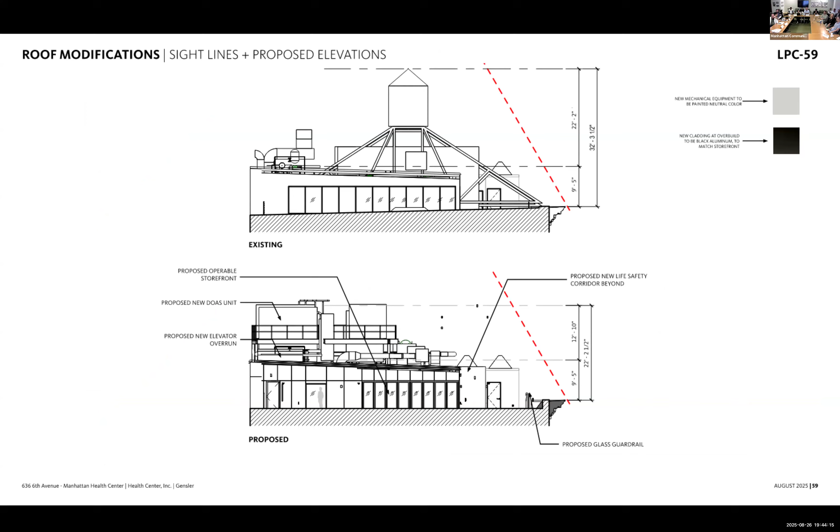I'm going to jump back in here to take you through the visibility studies. We erected a mock-up, so all of the new units you just saw on those axons were mocked up on the roof, in addition to a new glass railing which is going to be installed. So we're starting our visibility walk.

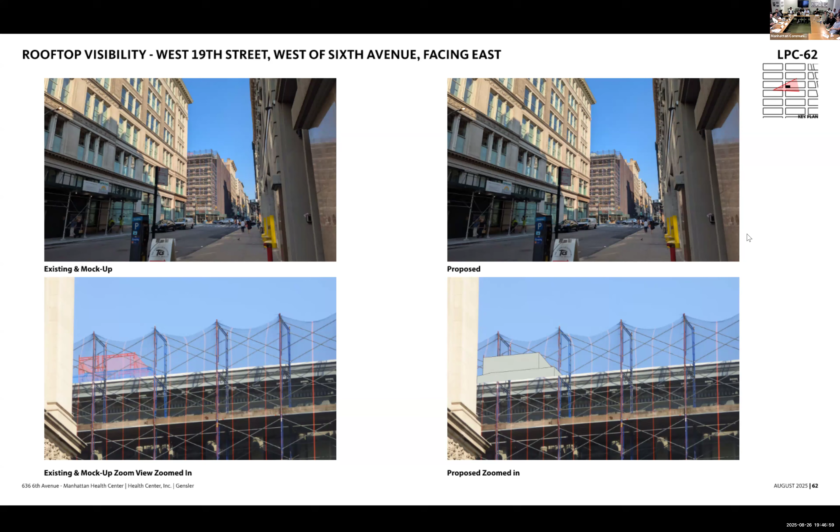The whole idea, as Michael mentioned, is that these units are as small as they can possibly be. They've been located as far north and as far east as possible, so we're getting basically these passing views as you walk up 6th Avenue, east and west. The whole goal is to not have this detract from the historic building at all. These are really passing views, really minimal visibility considering how much equipment is actually going to be installed.

So we're east now on 19th Street, directly across from the building. Our building is here - we're seeing the secondary elevation, the brick elevation, above the adjacent buildings. We're getting just this little peek of the new generator. We can see this rendered in here, again just being seen over the secondary elevation.

One more from east on 19th Street. We wanted to show this to you because, as Michael mentioned, the water tower is going to be removed, so we're actually reducing some visibility on this elevation. We're going to actually see that historic parapet line again.

And then this is our last view. So this is north at 22nd Street, looking south down 6th Avenue. We see the mock-up here in the upper left corner. What I want to point out is that we're seeing the new units and associated railings over the adjacent building - we're not actually seeing any of this equipment over 636, we're seeing it over the adjacent roof, behind the rooftop plantings, mechanical units, water tower, and bulkhead. All of that is hiding a lot of the visibility of our units, which is quite helpful.

The tan gray color is really going to help the units recede from view, and we're going to see it within that overall roofscape that I mentioned earlier, which we see throughout the historic district, along with some of the taller buildings and other bulkheads.

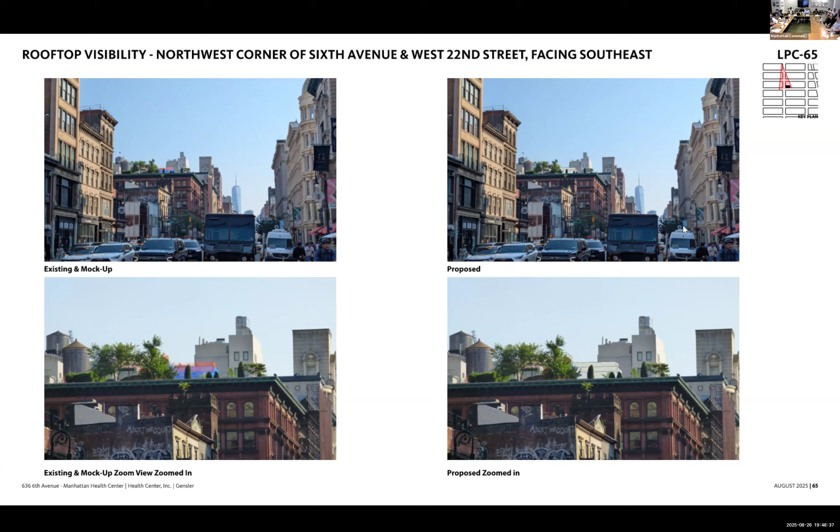So that concludes our formal presentation. We're happy to answer any questions and go back to any slides if you'd like to see.

Holy smokes. You guys had a busy summer. Have any of you seen any daylight?

Okay, so there's a lot going on here. Let's just start off - anyone have questions?

We're not going to be commenting on use at all, but did you guys ever consider maintaining a retail spot on the 6th Avenue side? The entire building is needed for use by the members. We have a large scale health program - even though we don't do general anesthesia - the entire space is needed for the tenants.

Okay, let's go back to the marquee and talk about some of the lighting. It looked like there were two vertical lighting components on each side of the doorways, at the base. Can you talk a little bit about that, and then the strip all along the outline?

Yeah, these are intended to be modern sconces on either side, just to get as minimal as possible, to create an entry point - a wash of light behind, pointing towards the view. A lot of the inspiration is also that these are members who work for hotels and want this entry to feel like a hotel entrance, to give a beautiful entry as they come to see a doctor. So this is very much, as much as it's inspired to be contextual, it's also inspired to be a hotel.

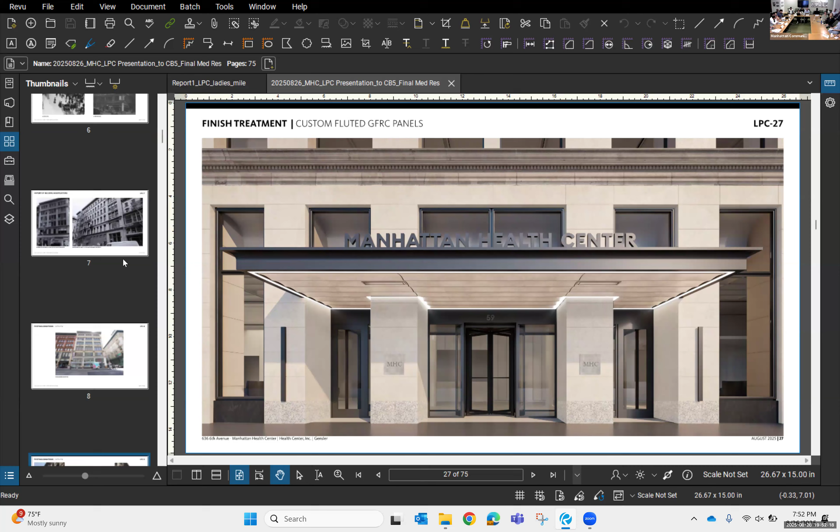Other questions? I wonder if I could go just to the third slide, the deck, comparing the existing to proposed - yeah, just that one. If I'm just walking along the sidewalk there...

Obviously visually it's going to look a lot different - there's sort of a horizontal barrier that's up like 8 or 10 feet, and that's going to disappear, right? Is that more in line with what it was historically? So historically, yes, there was a very clear transom bar expression, so we are getting closer to that.

But it was a completely different storefront system that was in place historically, both the 1896 configuration as well as the 1940. So we're really looking more towards the larger district context in terms of the inspiration for that pier articulation, the tripartite storefronts.

Our new design has the extra transom going across more aligned to this datum line you see here. The previous rolling gate had that band a little bit lower, spanning across this portion—that was purely for function. If you go back to the existing proposed design, I think we're getting a lot more glazing in the new design, a lot more transparency, which I think is a big positive here.

And just one other question on these two photographs—the black outline in all the windows, is that intentional? Does it match on the right side, is that steel, that black outline, at the ground floor? Yes, on the ground floor. Oh yes, that's just the new storefront framing.

George, if we can talk about the arched window. Sure. I mean, it looks to me like you're revolving the entire entry around that center of the building on the side street, with the arch window being a major focal point.

Yeah, we definitely looked at that, and the issue is the wood has deteriorated far beyond repair, so there's that level of, well, this is going to keep falling apart. Building that interior storm window doesn't really help fix the problem, so we wanted to replace it. Visually, it's going to look exactly the same, but you're just concerned about the functionality.

Well, the large one, I think, is pretty much glued on due to the layers and layers of paint that has been applied over time. The two side ones, I think, are actually operable, but the middle one isn't at all. So we didn't see a benefit to keeping the existing. So in your opinion, your research and all that, it's beyond repair.

Yeah, and also it's single pane, and you can get a better product, better installation, better energy efficiency tested window if you install something. We're doing everything that we can to make this a very energy efficient building, including for the whole enclosure, we are putting insulation and then putting walls back. So we are essentially sealing this building so that it's hyper efficient as much as we can, as far as we can actually go, but that's really the intent.

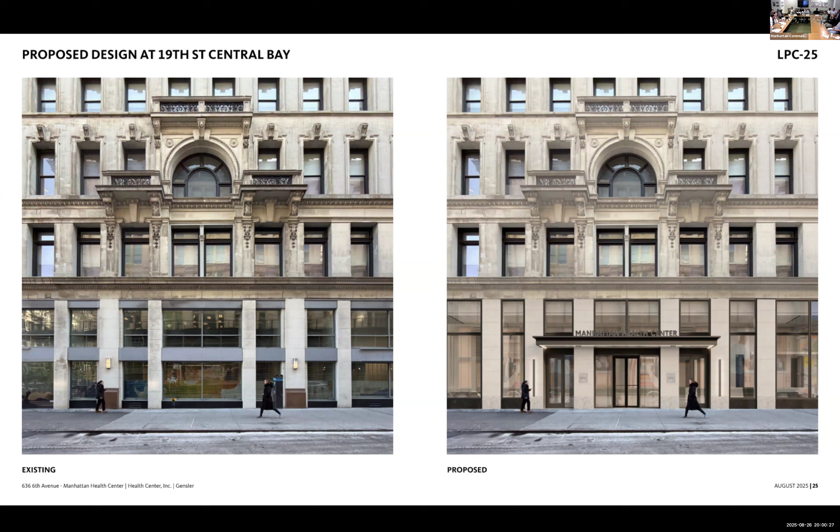Okay, and the other thing, could you go back to slide number 6, I think? Sure. For those of you who are unaware, at one time there was an elevated subway train that took people from town, which was south here in 1890, when these buildings were going up. And that brought the rich people to the department stores here to shop, which is why it's called Ladies Mile for shopping. I'm sure a lot of you guys know that, but perhaps there's somebody who didn't. Thank you. Thank you, sir.

I just have one quick one, kind of unrelated to landmarks. Is the concept of this building essentially going to be a dedicated doctor's office building for hotel workers and their families? It's a health center for hotel workers and their families, that's correct. So we'll have exam rooms, physical therapy, optometry, imaging. So it's an ambulatory health center.

We have 4 ambulatory health centers in the city, 2 in Manhattan, 1 in Brooklyn, 1 in Queens. And the hotel workers that live in New York City receive their primary care and their secondary care in these health centers. So we don't do surgeries, we do minor procedures, but anything you associate with a hospital, we have contracts with hospitals where we refer our members. But the primary care, secondary care, imaging, physical therapy, optometry, pharmacy, all of those services for our members and their dependents, they receive those services in our health centers.